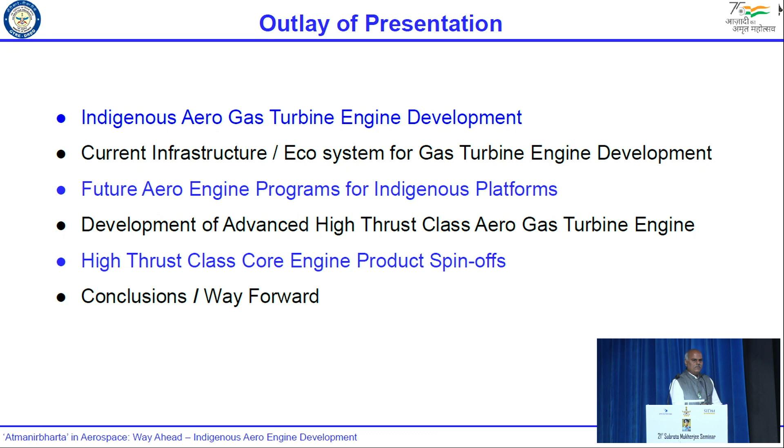The topic of my talk today is Aero-Engine development for indigenous programs. The outline of my presentation will be the current indigenous Aero-Engine gas turbine engine development with current infrastructure and ecosystem, future Aero-Engine programs for indigenous platforms, then development of an advanced high thrust class engine like for AMCA, and what is my way forward for these things.

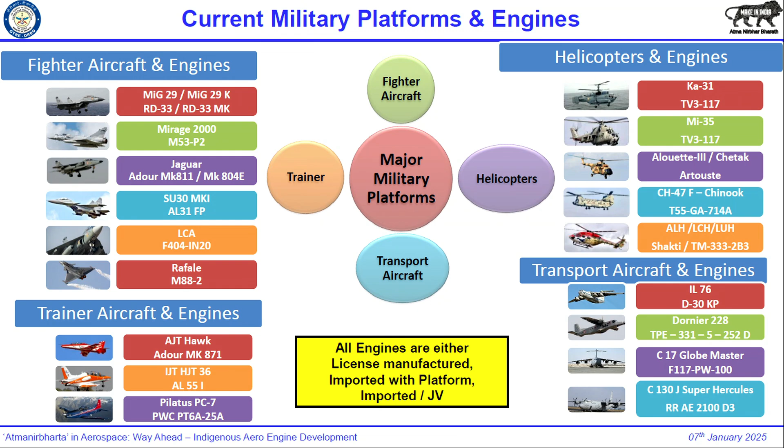Before going to the current indigenous Aero-Engine development, I want to bring out here: for the fighter aircraft, the trainers, the helicopters or the transport aircraft, most of the engines are either licensed manufacturing, for example AL31FP for Su-30, or we are importing the engine along with the platform like Mi-8 or the Rafale, or we are importing the engine for the indigenous platform like GE F404 for the LCA. However, we are having sustained indigenous Aero-Engine development, which I will be bringing out.

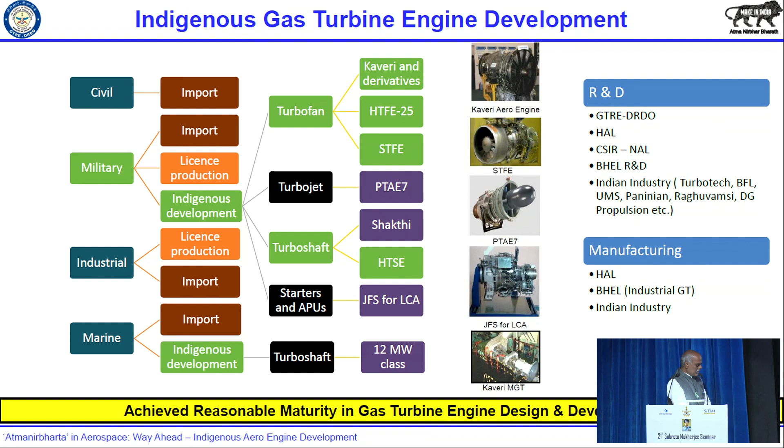In the indigenous development of Aero-Engines, in the turbofan vertical, GTRE is going ahead with the Kaveri derivative engine for the remotely piloted strike aircraft. Then HAL is going ahead with the Hindustan turbofan 25 kilonewton for the trainer. Then a small turbofan engine GTRE developed for the submarine launched cruise missile and long range land attack cruise missile. Coming to the turboshaft vertical, HAL is doing the Hindustan turboshaft engine, which is 1200 kilowatt. I will be bringing out what is the status.

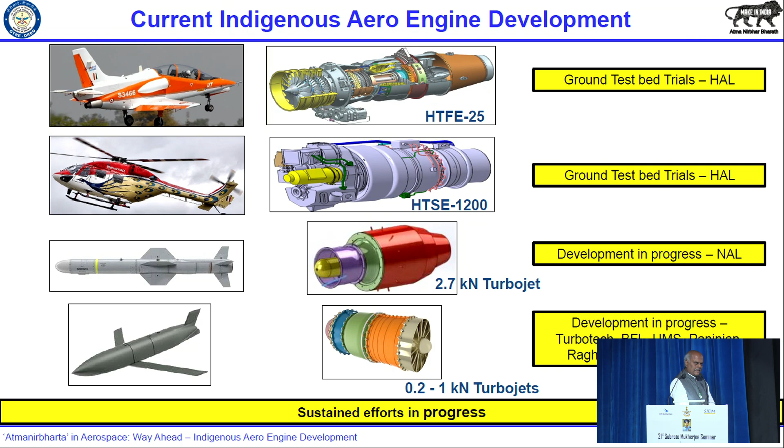Coming to the Hindustan turbofan engine, that is the 25 kilonewton engine, HAL already has carried out the core engine testing. Now they are going ahead with full engine testing on the test bed. Similarly, for the 1200 kilowatt turboshaft engine, they completed the gas generator testing. Then they're going with the free power turbine with the gearbox. Already ground test trials are going on. And for the 260 kg engine, the 2.7 kilonewton engine, NAL completed the detailed design and they are going ahead with module level testing.

Now, in the Indian industry, a lot of people like startups and MSMEs started developing some of these things, like Turbotech, Bharat Forge Limited, UMS, Paninian, Raghuvamshi. Very recently, DG Propulsion completed testing of a 100 kg engine. So a lot of R&D as of now is going on even in Indian industry.

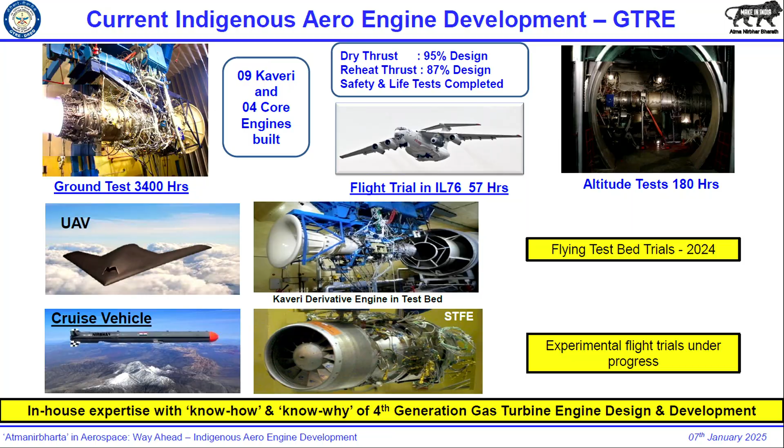However, we have gone ahead with the Kaveri derivative engine, which we are working on right now for the remotely piloted strike aircraft. In fact, the RPSA is being developed with the achieved thrust of the Kaveri engine in the dry mode, that is 49 kilonewton, and the achieved envelope and weight. Now, the Kaveri derivative engine has 75% commonality with the Kaveri engine, plus RPSA-specific features. For example, because it is a stealth aircraft with a serpentine intake, the distortion levels will be very high, and earlier we had fan flutter, so we designed and developed a new fan that is high distortion tolerant and flutter free.

Similarly, this is remotely piloted, so we designed and developed an autonomous full authority digital control. And it is a strategic platform, that's why we have gone ahead with design and development of a fuel control system with enhanced redundancy with the cross-channel data link, integrated it to the Kaveri derivative engine, and tested it in GTRE and 75 hours of altitude testing at CIAM, Russia. There we have demonstrated the performance and operability with unrestricted carefree throttle movement, where we had severe issues in the Kaveri engine because of low speed stalls, fan flutter, and LPT blade resonance issues. Everywhere we were able to go with software changes.

But in the Kaveri derivative engine, with these design mods, we were able to address all the issues, and what is required, unrestricted carefree throttle movement, we were able to do. Very recently, we have completed 50 AMT cycles, which gives confidence from the structural integrity point of view.

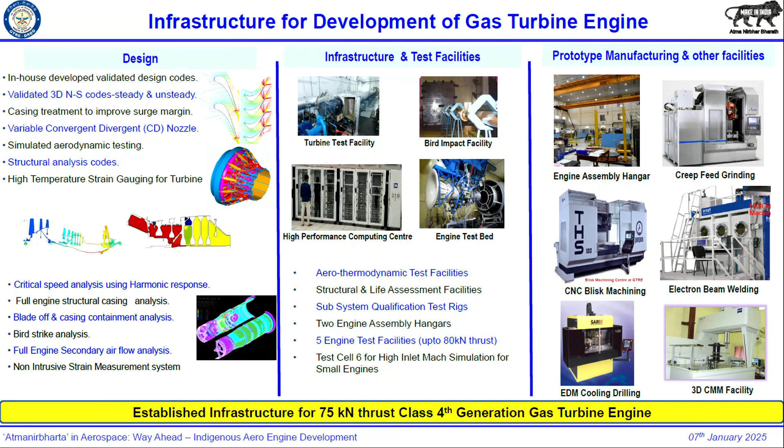With this, we were able to design validated tools up to 6.5 thrust to weight ratio. We had the capability in GTRE and Indian industry. Then we have infrastructure for aerodynamic testing like compressor, combustor, turbine, afterburner, then overspeed burst margin, cyclic spin, all up to 75 kilonewton thrust engine, and manufacturing facilities also we are having.

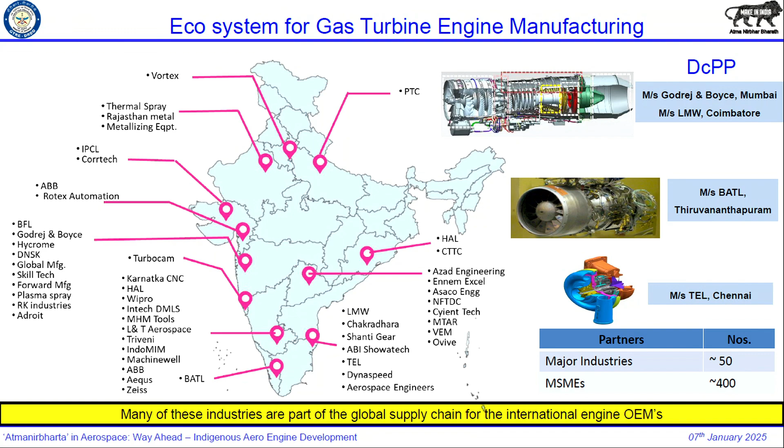For the component manufacturing of the Kaveri derivative engine, small turbofan engine, even the turbocharger, we have gone ahead with Indian industry partners. Across India, we can see all the people we have gone ahead with. And most of them today are part of the global supply chain of the OEMs.

Now we are going ahead with our Kaveri derivative engine under development cum production partner, DCPP, with Godrej, and the small turbofan engine, we are going with BrahMos Aerospace, BATL Thiruvananthapuram, and we have gone ahead with our turbocharger with Turbo Energy Limited, Chennai.

Then we are closely interacting with academia, which is one of the things everybody is talking about. DRDO has 15 DRDO Industry Academia Centers of Excellence. For COPT, we call it Center of Excellence for Propulsion Technology, Gas Turbine Materials GTMAP, then Air-breathing Propulsion. With TDF, we are working with all Indian academia and we are developing technologies I will be coming to later.

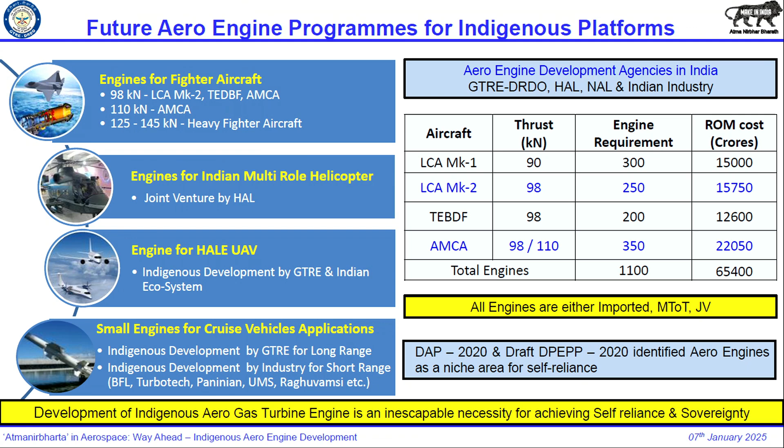Now coming to the future aero-engine programs for the indigenous platforms. Now LCA Mark II, a 98 kilonewton engine is the requirement, that is the F414 INS6. India is planning to go ahead with the MTOT for the F414 INS6. Coming to 110 kilonewton, which is for the AMCA, for ISA conditions, the thrust which meets the full mission requirements. We are going ahead with the first 2 squadrons with the 98 kilonewton and the remaining 5 squadrons will be with the 110 kilonewton for the AMCA. I will be coming to co-design, co-development for that engine.

Then IMRH has brought out the JV with Safran and HAL, Aravali. Then we are planning for our own indigenous HALE, for which almost a 1200 HP turboprop engine is required, and other small turbofan engines, small turbojet engines, the expendable engines for our cruise missile applications.

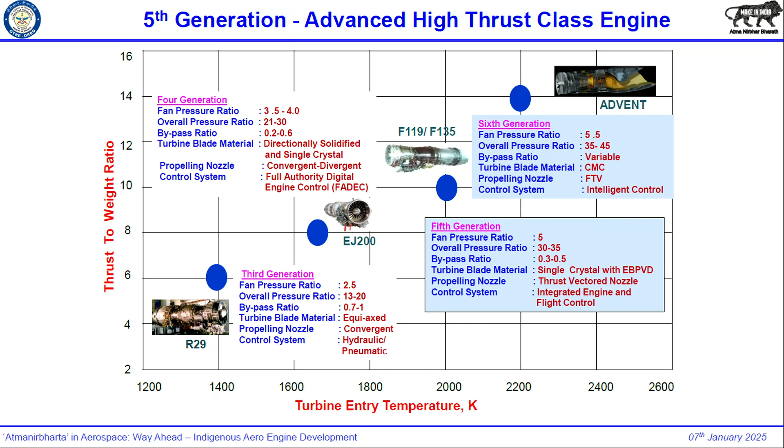Now before going to the advanced high thrust engine, generally a 5th generation engine is characterized by a thrust to weight ratio of 10 and a turbine entry temperature of 2000 Kelvin. So for the 5th generation engine, the fan pressure ratio is 5, overall pressure ratio of 30, a bypass ratio of around 0.5, with single crystal turbine blades with electron beam physical vapor deposited TBC, thermal barrier coatings, and with integrated engine and flight control systems.

Coming to the 6th generation, the thrust to weight ratio will be in the order of 14, whereas the turbine entry temperature will be 2200 Kelvin, which is almost near the hydrocarbon adiabatic flame temperature maximum itself, 2300 Kelvin.

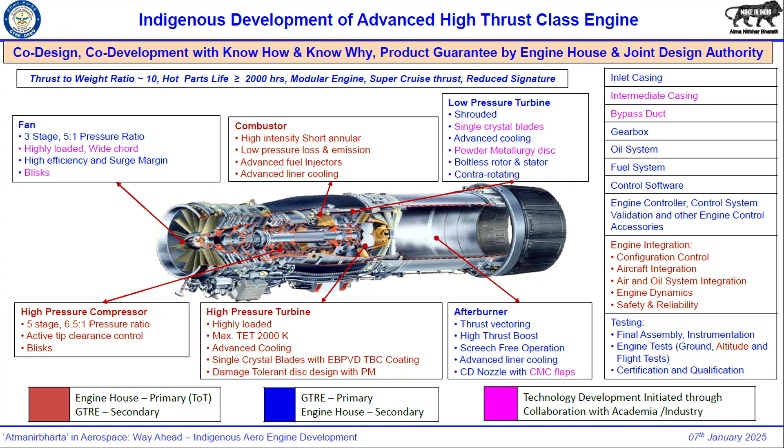So GTRE or DRDO proposes to co-design, co-develop the 110 kilonewton with know-how, know-why, so that tomorrow any variants or any new engine, by acquiring the technology blocks, design as well as manufacturing, India can do on our own. So as I said, thrust to weight ratio of 10 with a hot end part life of 2000 hours, low specific fuel consumption, lower size, modularity, reduced signatures; the technology levels are advanced in terms of design and analysis, materials, manufacturing and processes.

That's why we propose the international engine house should lead in the design and development of the core engine, what we call HP compressor, combustor and turbine, whereas DRDO will lead the fan, LP turbine, afterburner and the subsystems like fuel system, lube system, gearbox, etc.

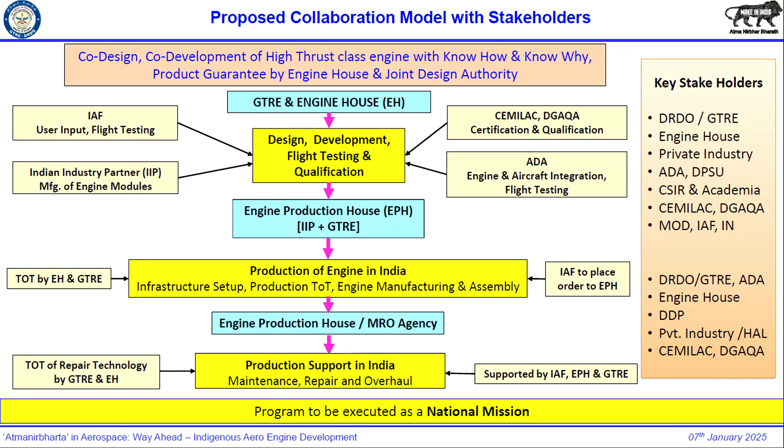So with this, we proposed the development model. Here the design, development, flight testing, the main stakeholders are DRDO, that is GTRE, and the international engine house. The other major stakeholders are the Indian industry partners, where we want to go to develop, manufacture; it is required 15 engines for the testing and 10 engines for the flying. Totally we require 25 for the flying and qualifying.

So we should go through the DCPP for the manufacturing. He is one of the major stakeholders. Similarly, CEMILAC and DGAQA for the certification and qualification. Then IAF for the user input and flight testing, and ADA for the engine-aircraft integration and flight testing. And we want to go ahead with the Indian academia, all R&D labs, like NAL, CSIR, all the labs and DPSUs, and this we want to take as a national mission.

Coming to the manufacturing, once the testing is over, the Indian industry partner will be becoming the engine production house, where the orders will be placed by the user, whereas from both GTRE and the engine house technology transfer will be happening. The similar way we will be going for the product support also, that is for the MRO. So the program will be executed as a national mission. As I said, the technologies are much higher, advanced technologies.

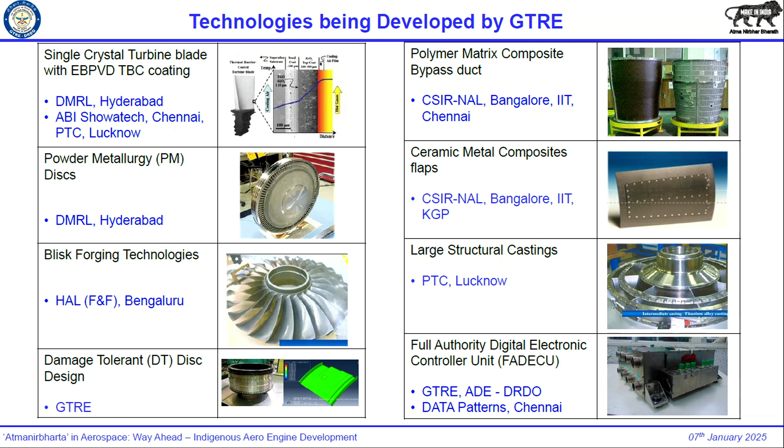And we started with some of the things like powder metallurgy disc, single crystal with EB-PVD TBC with our sister laboratory DMRL, large structural titanium castings with PTC Lucknow, blisk forgings with HAL, PMC bypass duct, CMC nozzle petals with NAL. Already we started. Of course, the TRL levels are less.

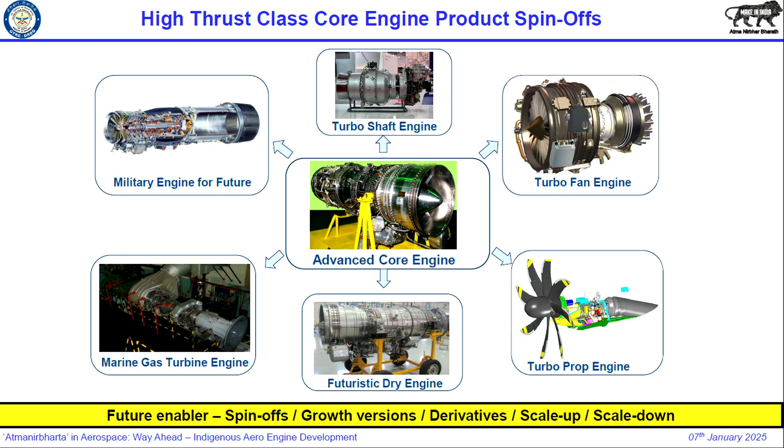Once we develop the core, there are a lot of applications, because we are telling there should be a synergy between civil and military, so that we can go for different variants of the engine. Turboshaft engine we can go ahead, civil turbofan engine, turboprop engine, and even we can go for the marine.

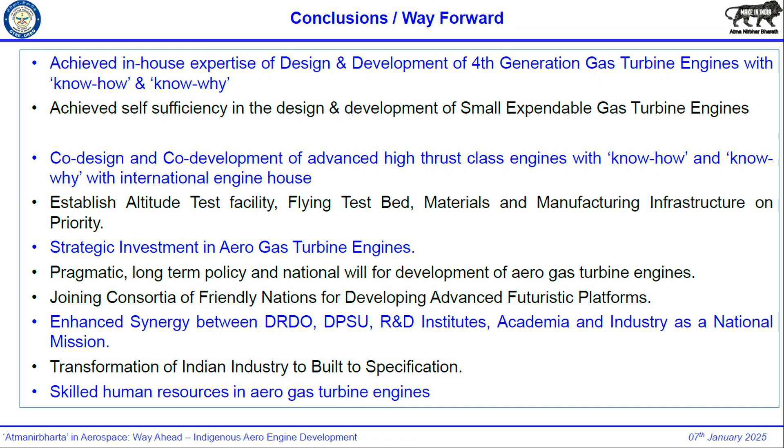Coming to way forward and conclusions. Co-design, co-development of an advanced high thrust class engine with know-how, know-why, with an international engine house. Why, I already explained. Basically, we should establish altitude testing. For example, for the last almost 9 months, we are begging CIAM to give the time slots. They're not giving because of the geopolitical situation. They want to test their engines. Windmill, spool down, autorelight, we have to complete. We are not getting even the time slot.

So we should have our altitude test bed, flying test bed, material, manufacturing. As this morning Secretary DDR&D mentioned, we don't have our own 50,000 ton hydraulic press, where all the blisks have to be forged. In India it should be a national facility. Let it be for NTPC, let it be for BHEL, for all of the things. So establishing material, manufacturing and testing is a must at this time.

Then strategic investment in aero gas turbine engines. Already everybody brought that up. For example, $250 million we have spent so far on the design and development of the Kaveri engine, whereas a flying engine in that class requires 2.5 billion. Then pragmatic, long-term national will is required for the aero engine. For the last 20 years, we are speaking of the commission for aerospace. That is a must actually.